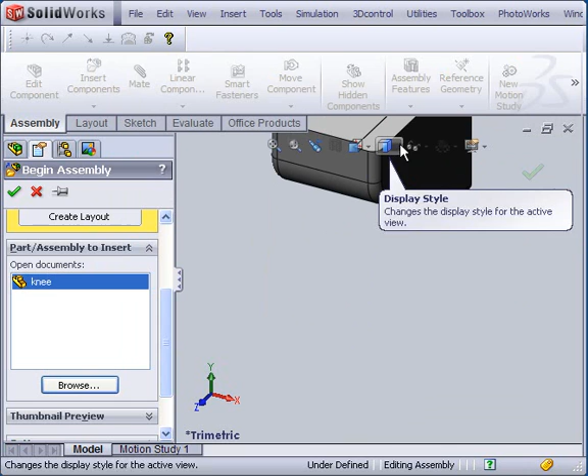With the knee part open, you want to turn on your origin so you know where to place it. So you can go up here under Show Hide Items, click View Origins, click out of there, and then be careful not to click because you might place it somewhere else. You want to put your mouse cursor on top, and you'll see that little icon that indicates the two origins are on top of each other. So then you'll click there.

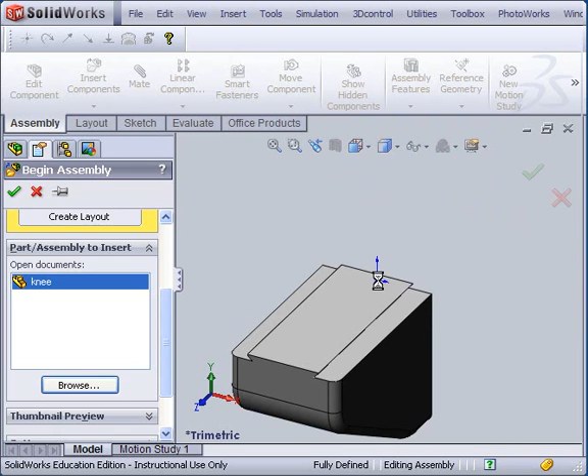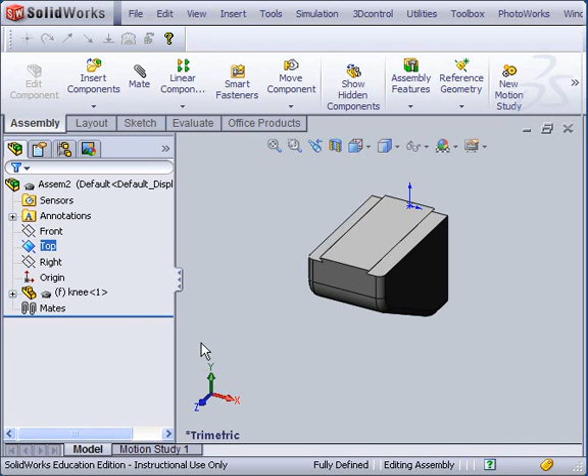So you've inserted your first part into the assembly. That first step, all that does is it aligns the front plane of the first component with the front plane of the assembly, the top plane of the assembly with the top plane of the first component, the right plane with the right plane of the first component. You don't have to do that origin aligning step, but it makes it nicer if you're basing everything off of the first component you put in the assembly.

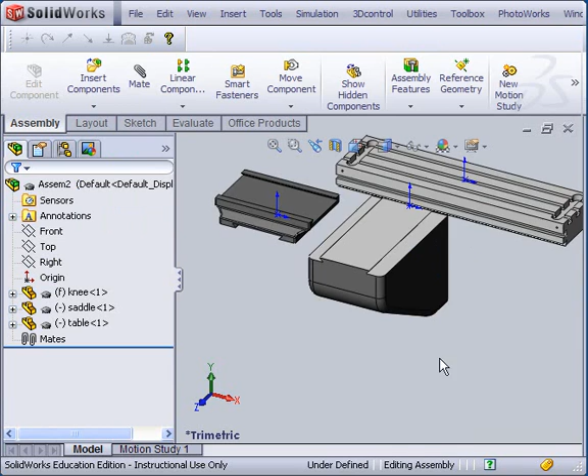So now I'm going to bring the others in. Let's go get the saddle, place that in here, and while we're putting some in, we'll get the table. Place that in there. All right, so now I'm going to do some mates.

So I'm going to go up here and select mate, and then I'm going to grab this top surface. I'm going to click my third mouse button, rotate around, and grab the bottom surface of the saddle, and check OK.

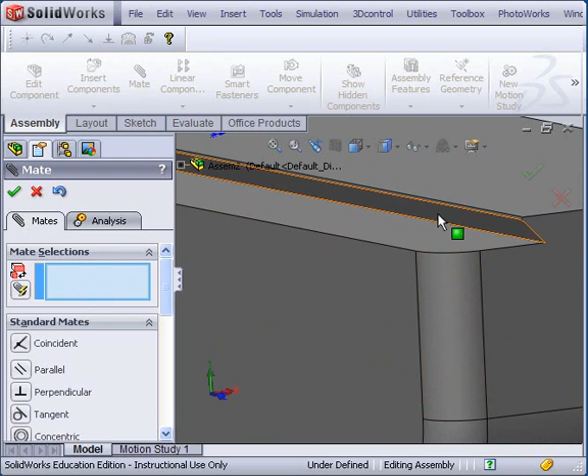Then I need to grab one of the dovetail faces in order to constrain it in the other direction. So I'm going to grab that face of the dovetail, then I'll come over here, grab this face. Now those two are mated. Your tutorial will tell you to do a third step. I'm going to omit that here, but right now if you look, this slides back and forth on the dovetail, just like it would in real life.

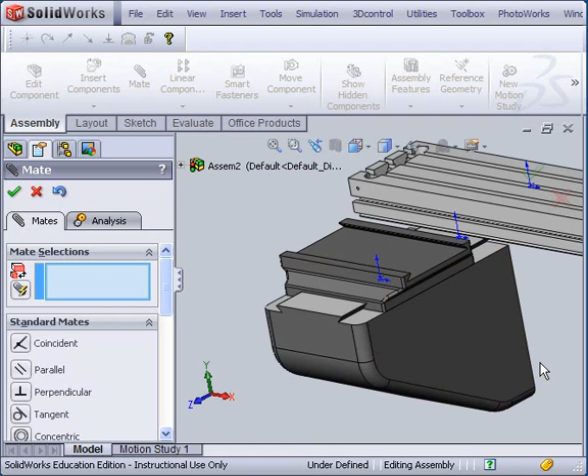The next one I'm going to do is mate this surface to the bottom surface of the table, and I'm going to repeat that dovetail step on the new table. So click there, rotate around, click there. If you click the wrong dovetail, your mate's not going to work out right.

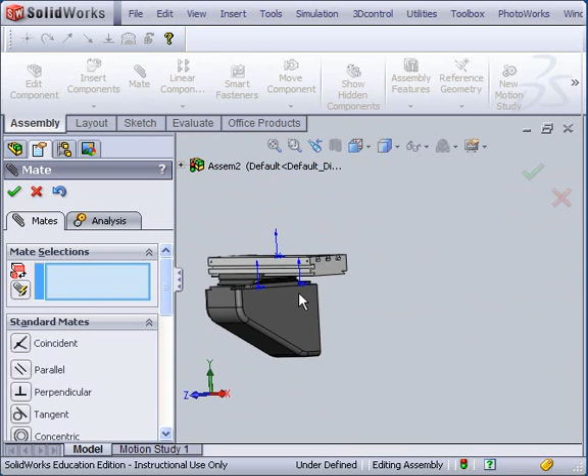So now, if you imagine this mill has handles on it, I can drag those parts back and forth. Now, if a part's in the way, like this table, I can click on it and go to Hide Components and it'll fade out. It's still there, it's still over in your feature tree, but it's hidden from our view.

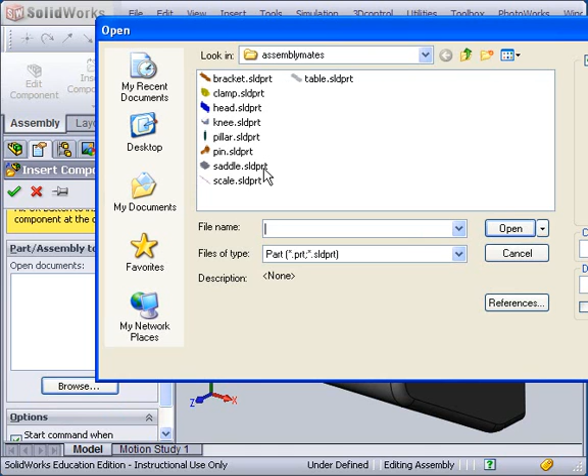So the next thing I'm going to bring in is a little holder for our encoder. So I'm going to go, and I believe it's called bracket. Yeah, it's this part right here. You can also double click instead of hitting open.

And I'm going to line this up with the front face of the saddle. So I'll click that front face, I'll click this face on the bracket. Those two line up. Check OK.

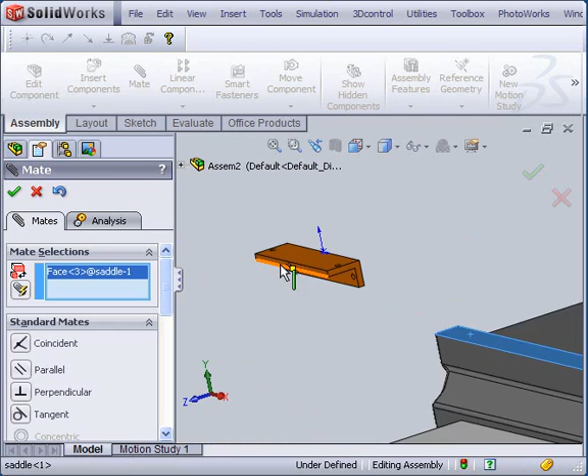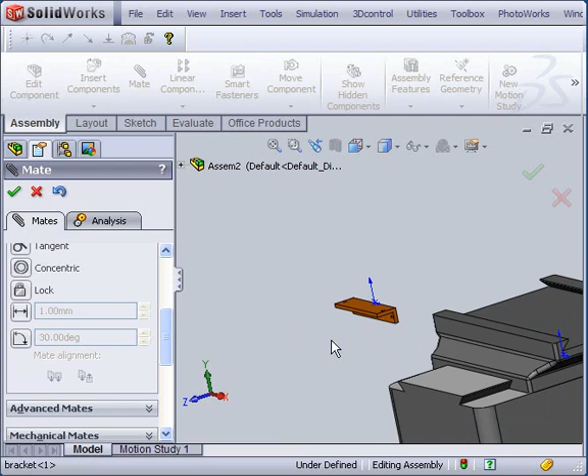I'm going to click this top surface and this surface. Those two, I want to offset them. So right now, the distance between them is 58 millimeters. I want to make that 3. And I also want to hit flip dimension, which will sink it below that surface. So now if I look, these two are moving together.

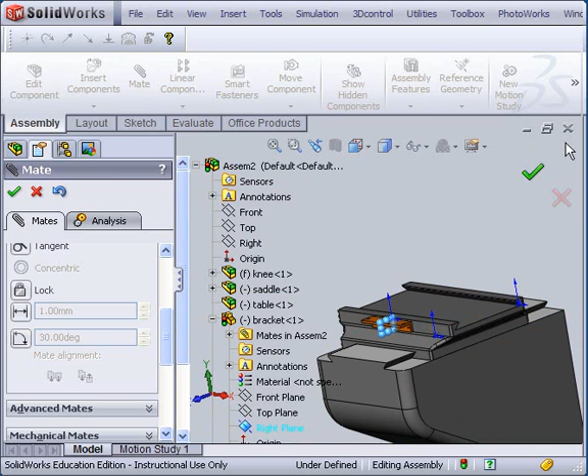The last thing I'm going to do is select the right plane of bracket and the right plane of table. I'll exit out of this mate first.

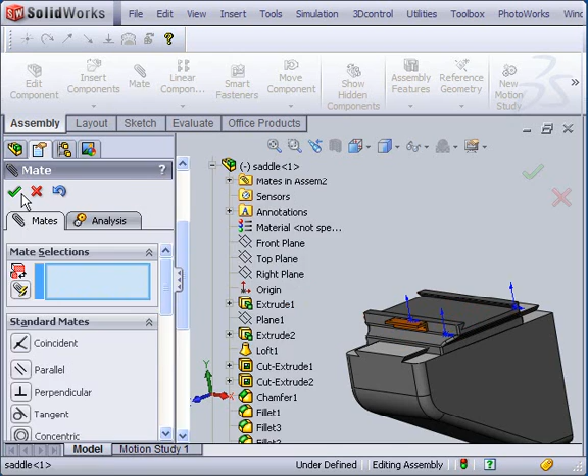All right, so since table's hidden, I'm going to turn— oh wait, sorry, I wanted to do the right plane of saddle. That's why it wasn't letting me do that. If I click mate, go in here, I'll expand this again, go to the right plane of bracket, and then go up here to saddle, expand saddle, and get the right plane of saddle. It'll mate those two as well, so I can check OK. So now that part's been added.

The next one I'm going to add is a blue piece that's our encoder. It's called the head. So I'm going to place that on here. First thing I'm going to do is rotate around and zoom in. You could also use select other for this portion.

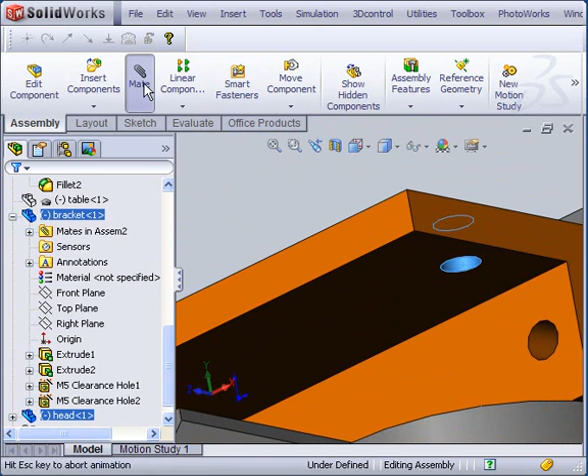And then if you hit control, that will select both surfaces. You can open up the mate. And SOLIDWORKS assumes that we're going to make those concentric, which we are. So we check OK. Click this face.

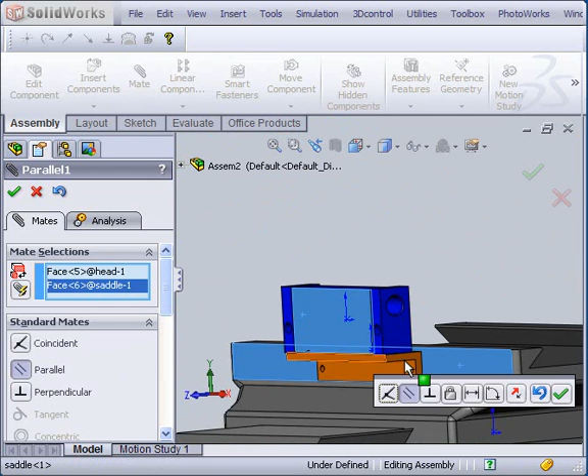Click this face, check OK. Then the last thing I'm going to do is click parallel, and then select this face and this face. I want them to be parallel.

So now, if I exit out of check OK and exit out of mate, I can move the saddle back and forth, and I can't move the encoder all around, and the only thing that can still slide is the dovetail joint.

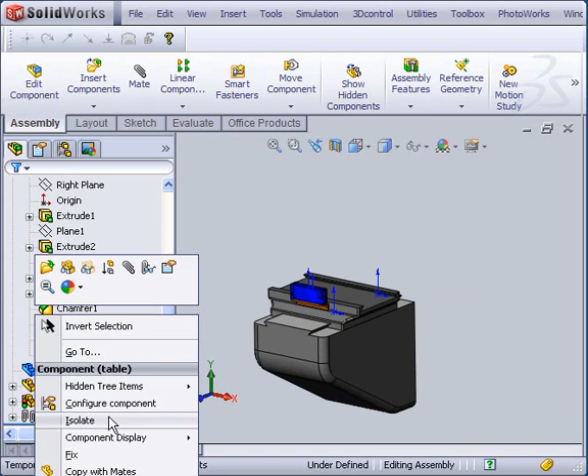So that's pretty good. The next thing I'm going to do is turn my table back on. If I go up here to show components, the table comes back on.

I'm going to bring in some more components. I want to get the pillar, place that, insert more, browse. I want to get the clamp, and browse, and I want to get the pin. So now I have all three of those components in there.

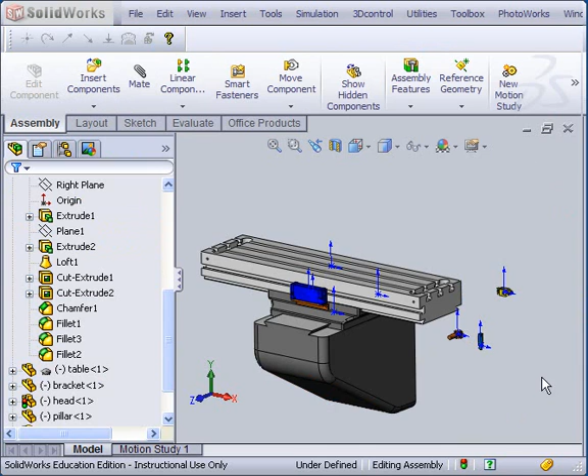I'm going to zoom back in, and the first one I'll do is use the pillar. I'll select this cylindrical surface, which would be the threads, click mate, and zoom in up here and select that surface. If you see it over here, it's pointing the wrong direction, so I want to change the mate alignment direction, and now it would be threading in here correctly. So that one's taken care of.

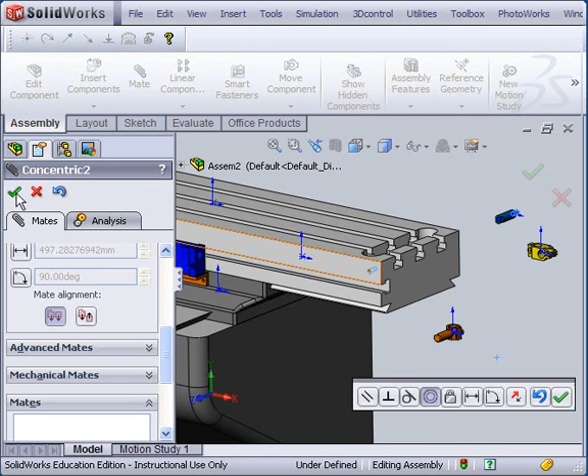The next one I'm going to do is this surface, and I'll zoom in and get the shoulder on the pillar, and check OK. So now I have that part in place.

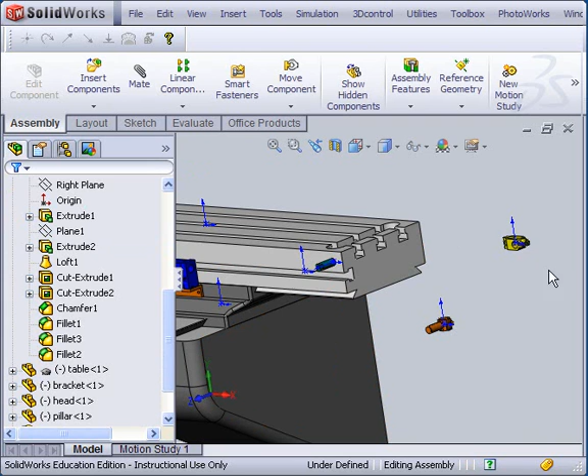Now, there's some stuff that SOLIDWORKS has you do with triads. I'm going to just rotate this component. Up here under Move Component, I can click Rotate Component and zoom in on this clamp, and get it into the orientation you need. So it's kind of around like that. This cylinder should be lined up with that cylinder there.

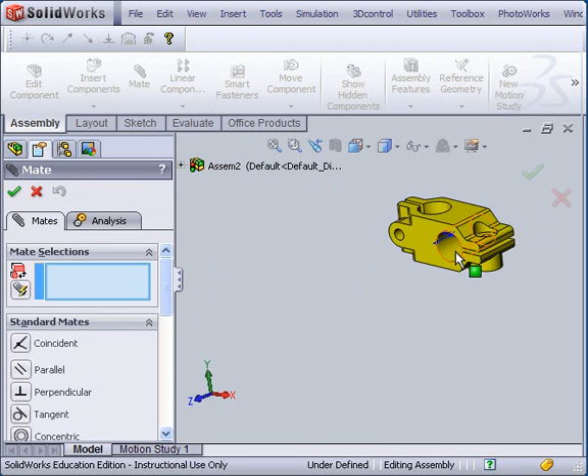So then, when I click Mate and zoom in, I grab this cylinder, and grab this cylinder, check OK. If I look, that's lined up.

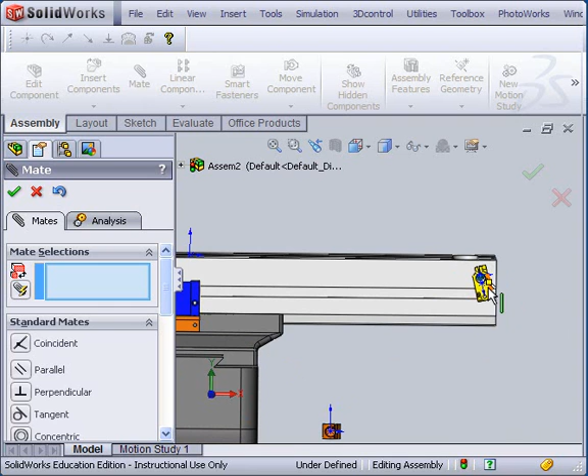I can bring it over to this end right where it was before. Then I need to, you can play around with moving these around to get them lined up. So I want this one to rotate around, I want it to rotate around like that.

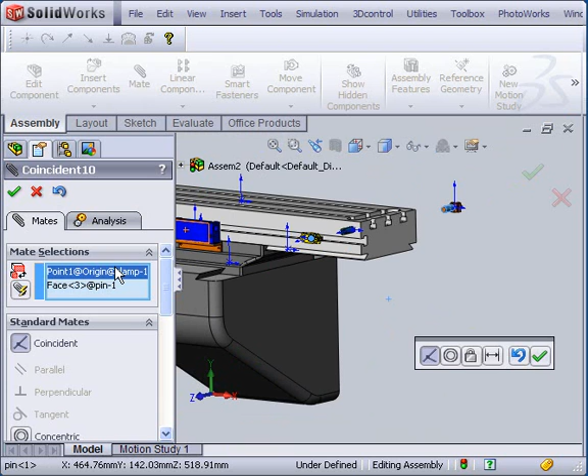Then the next thing I'm going to do is come down here and click on this surface, and I have this point selected. That shouldn't be there, I'll delete that. I'll come over here and grab the vertical surface in the clamp, and that's going to be a coincident, not a concentric. That was what was messing that up there.

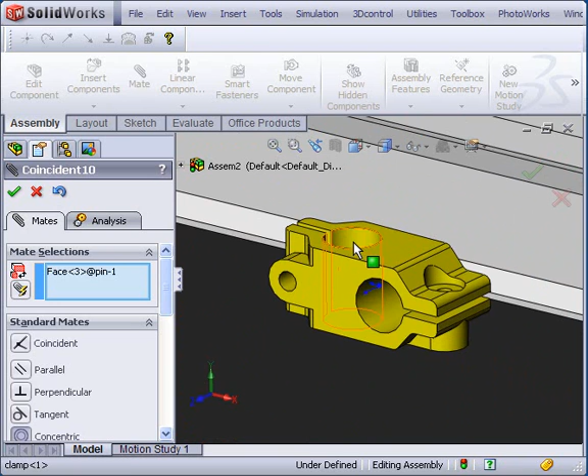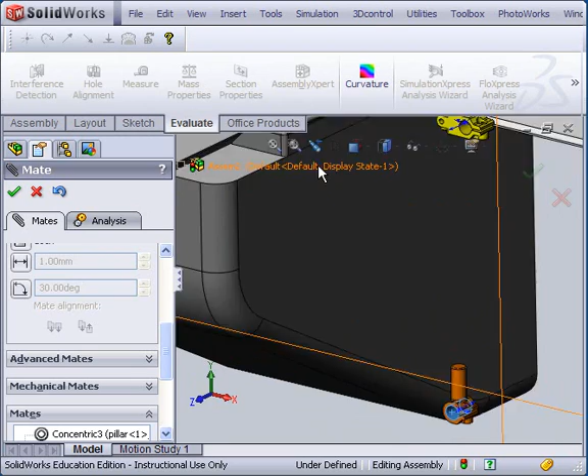So that's currently aligned the opposite direction, so I'm going to flip it. There, that's taken care of. Then the last thing I'm going to do is line the center of this one up, check OK on that, and line the center of this one up with the center of that. If you look, now that's moved up into the position that you wanted in your tutorial. There, that's taken care of.

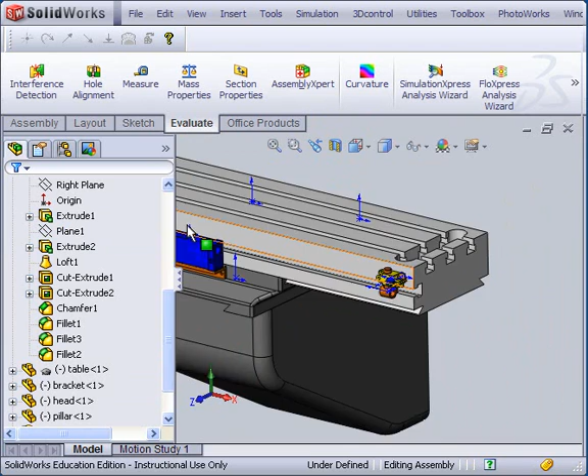The last thing I'm going to do, I'll go back out under Assembly and go grab the scale, this part right here. Open that up, bring it in, and this clamp holds that scale in place.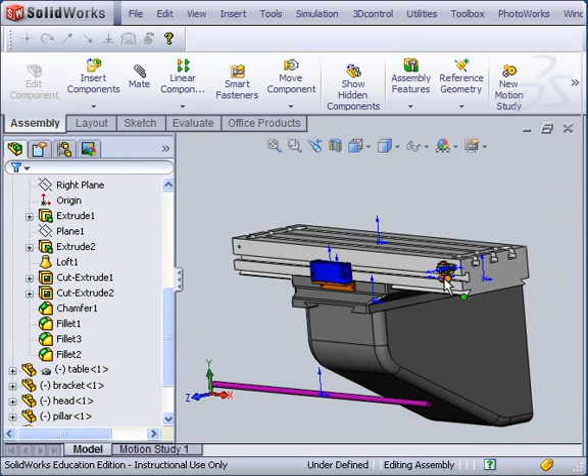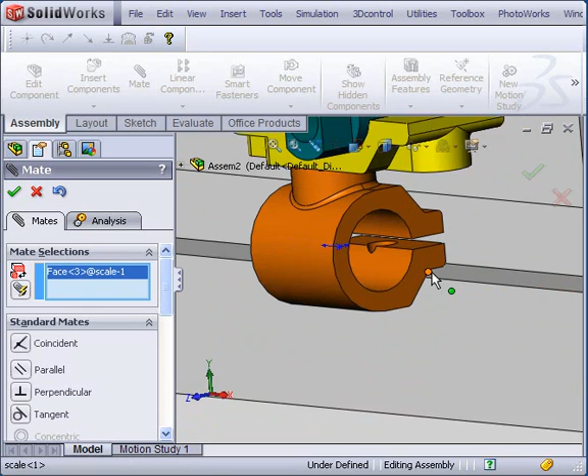So I'm going to click on the outer surface of the scale and the inner surface of the clamp. SOLIDWORKS assumes, since they're round, it wants it to be concentric, so I'm going to check OK with that. Then I'm going to put a mate in between that surface and this surface right here. Check OK, zoom out.

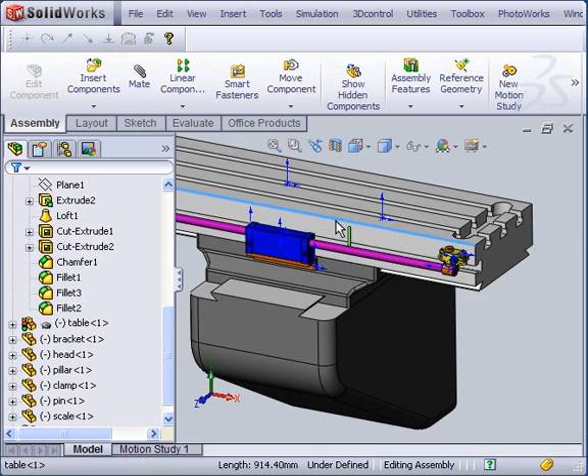Now you can see if I move this around, the encoder moves in and out like it should, or the scale moves in and out of the encoder. This is the part that'll tell a milling machine. If you aren't used to using dials and you've only used digital readouts, this is the encoder for a digital readout. So that's what's going on there.

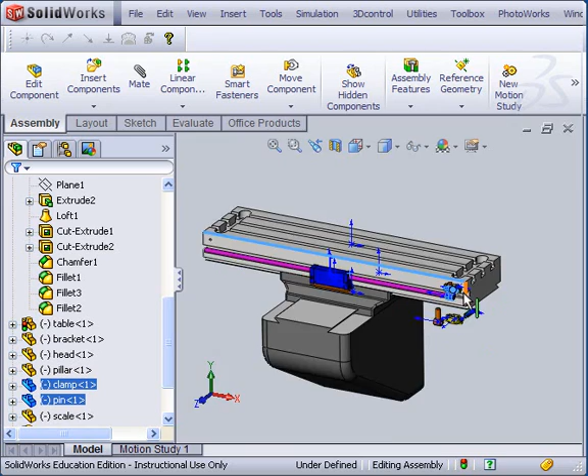You'll continue the last part. If you hit Control, you can copy these pieces, and you'll need each one to go over to the other side and assemble the same thing over there. The only thing over there that you don't want to do is line up the ends, because one of the last steps in your tutorial is to come in here and change this mate.

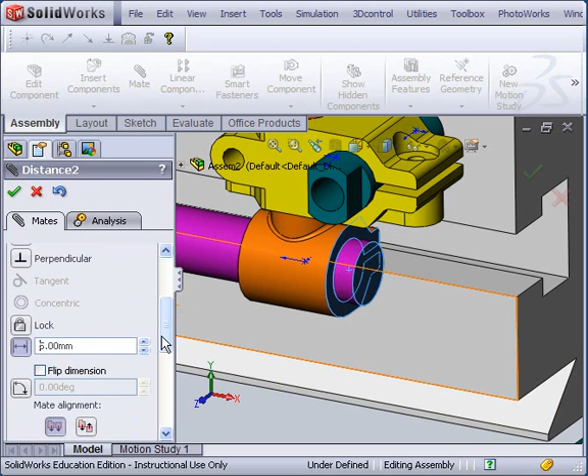So if you go and look, if you open up this part right here and go to mates, and you see that coincident mate right there, you can right click on it, go to Edit Feature, and change it from coincident to distance and set it to 5. That'll make your scale look more centered in the other clamp as well.

The other thing with these is save often, so make sure you're saving your part, and you can complete the rest of the part by following the tutorial.